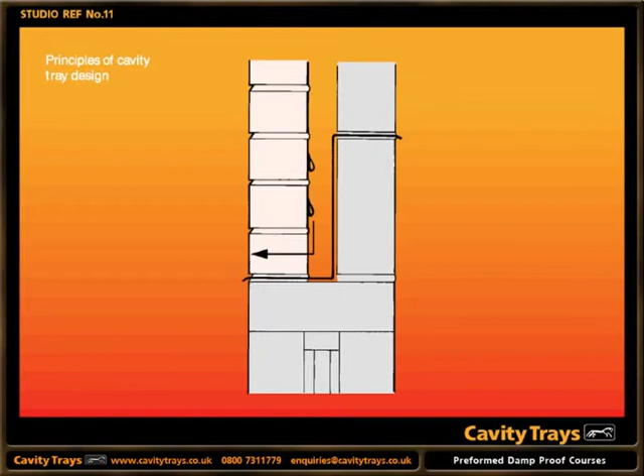However, observe the shape of the DPC drops vertically against the inner skin. Such proximity with the inner skin is best avoided. And as this arrangement lacks the requisite stop ends, water can discharge into the cavity and against the inner skin, which is unacceptable. If the cavity is fully or partially insulated and water discharges into such insulation, the water will saturate and spread indiscriminately in all directions. And this assumes a DPC profile is uniform and correctly shaped.

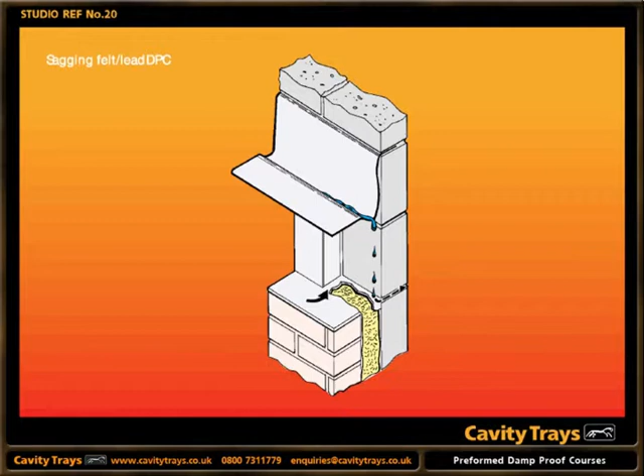If it's distorted, out of level, or permits pooling water to track back under it, the shortcomings increase. Site-formed DPCs of this style lack stop ends as defined within the regulations. Without stop ends, water discharge into the cavity cannot be eliminated. The use of roll DPC relies on the installer forming the right shape every time. This is why preformed cloaks are often used instead.

Preformed cloaks are ideal in many situations, such as at the base of a building, because at the base of a building both skins commence level with each other, enabling a preformed cloak to sit comfortably in both and provide the requisite profile. But as a cavity wall rises, it is not unusual for the skins to drift out of level.

In this example, the cloak profile provides 225 mm rise, but the drifting of skin levels results in the brickwork course being lower than that required by the cloak. The result is a distorted arrangement.

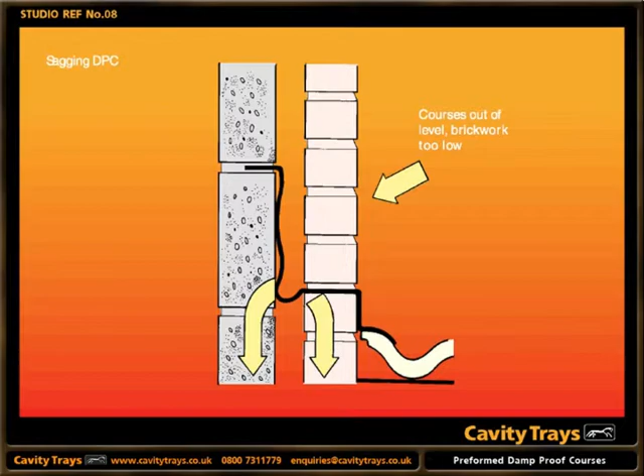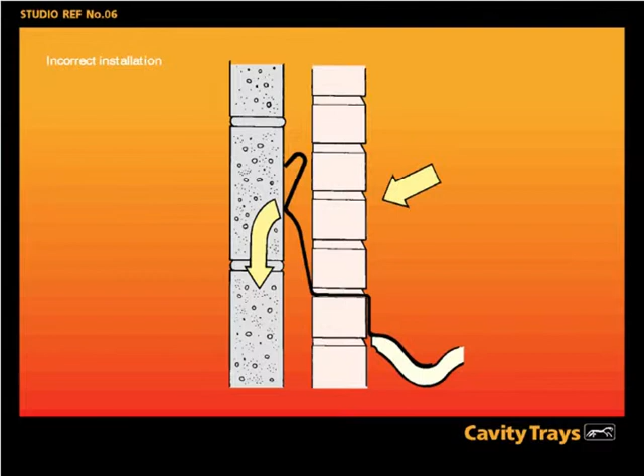When skin levels drift and the measurement by which the cloak rises cannot match the intended inner skin course, then the opposite can happen. Skins drifting out of level is a common occurrence. Look for the telltale signs on site, especially at plate level, where correction is carried out and one often observes an additional course of brick or buttering up of the plate.

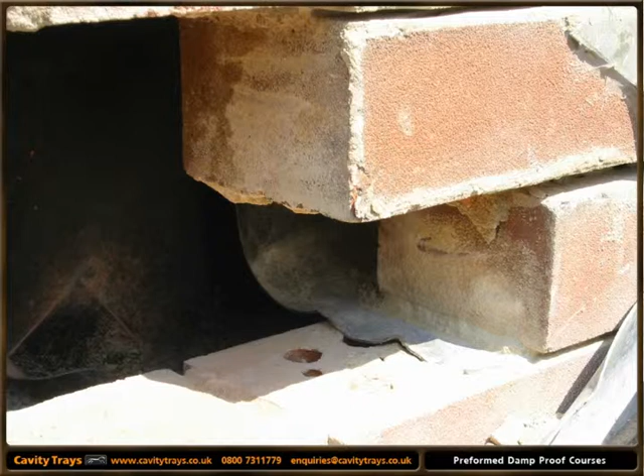Many errors can occur on site, and here we have a typical example. This DPC ends abruptly and has no stop end. The tray is also not bedded on mortar, promoting the possibility of capillary and hygroscopic penetration below the base of the DPC. And the use of perforated bricks can pose further problems if water can use the open perfs as vertical conduits via which to gravitate.

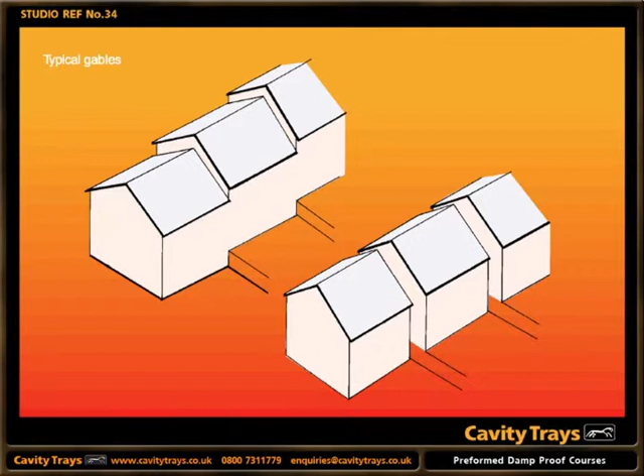The outer skin of a cavity wall is designed to saturate, and the cavity ensures the inner skin remains dry. But in the case of stepped and staggered gable abutments, the need for damp arrestment changes. The outer leaf above the finished roofline becomes an inside wall below it. There is a requirement to arrest the dampness from gravitating downwardly in the same skin and permeating below the roofline.

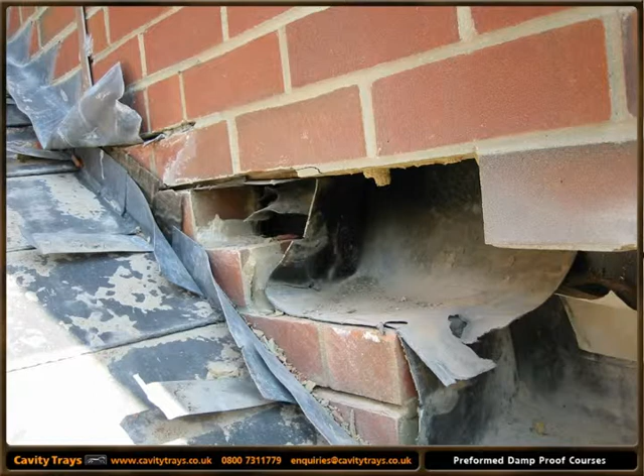This is an attempt to provide arrestment that failed. The DPC profile is irregular, distorted, and continues too far into the roofline. The DPC front edge terminates too far back from the finished face, whilst the entire arrangement lacks mortar. It is dry-bedded. The external flashing does not unite correctly with the DPC to provide uninterrupted linked protection.

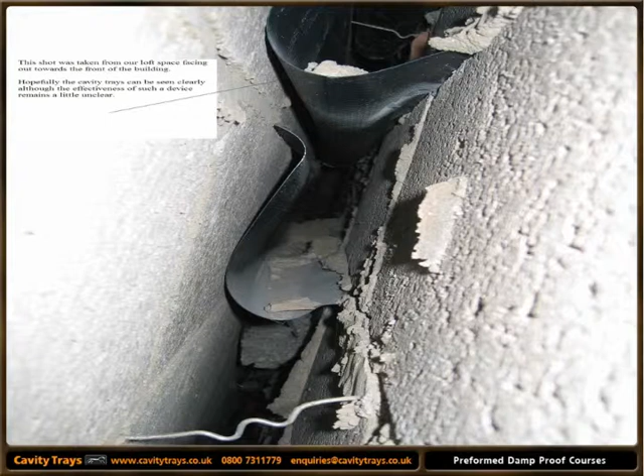This view into a typical cavity shows what can happen using standard rolled DPC to create a stepped arrangement for a sloping abutment. The DPC profile is irregular and badly formed, with no vertical continuity between sections. Looking from the inboard end nearest the roofline, there are no stop ends. The DPC is open-ended, so arrested water can discharge at either end, with no guarantee where it will land.

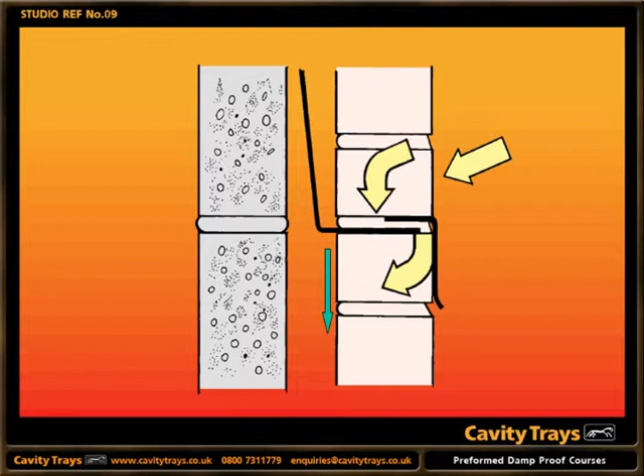Where DPCs and trays require flashings, it is essential the two interface correctly. In this instance, a cover flashing has been introduced incorrectly, positioned above the DPC, allowing arrested water to permeate under the flashing. Flashings, if introduced separately, must terminate under the DPC to a depth and lapping compression that provides a watertight relationship. This extract from the NHBC standards shows the relationship required to form a satisfactory union between flashing and DPC.

The mortar below the cavity tray DPC is raked out while still green to provide the required recess. The flashing is inserted and wedged. The union is subsequently pointed in.

Importantly, this approach assumes the DPC is correctly positioned in the first instance. If the flashing is a running flashing, as opposed to a lap flashing formed with separate pieces under each DPC tray, be aware that a running flashing cannot provide weathering protection to the same extent. A lapped flashing offers greater protection and is always preferable.

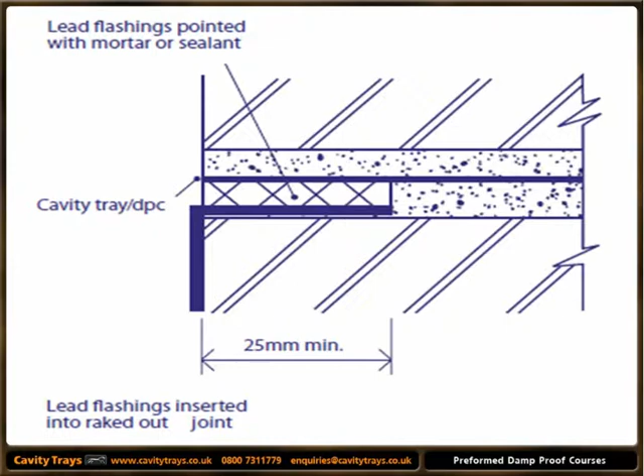Raking out under the DPC was not possible in this example, as there was no mortar underneath - the DPC had been dry-bedded. The attempt to provide a slot for the flashing damaged the DPC edge. The resultant installation was unsatisfactory for three reasons: dry bedding, damaged DPC, and the flashing ending up on top instead of underneath the damp course.

Since the founders of the company, now called Cavity Trays Limited, created the first cavity tray in the 1920s, the expertise and understanding of the current company has grown. The company has a lengthy and proven track record unequaled by any other organization within this specialized field.

Approved products of Cavity Trays Limited are referred to as cavity trays or cavitrays. They are all accompanied with a performance warranty. The first preformed cavity tray, or cavitray, designed for stepped and staggered gable abutments is the Type X.

The Type X is a preformed DPC tray specifically made for stepped and staggered gable abutments. It is molded from polypropylene DPC and supplied with its own flashing already attached. Type X trays are built into the outer skin only, just above the abutting roofline. The interconnecting trays arrest cavity wall water flow and dampness, preventing it from gravitating downwardly below the roofline. The integral flashing of each tray eliminates the need to cut and rake out for flashings.

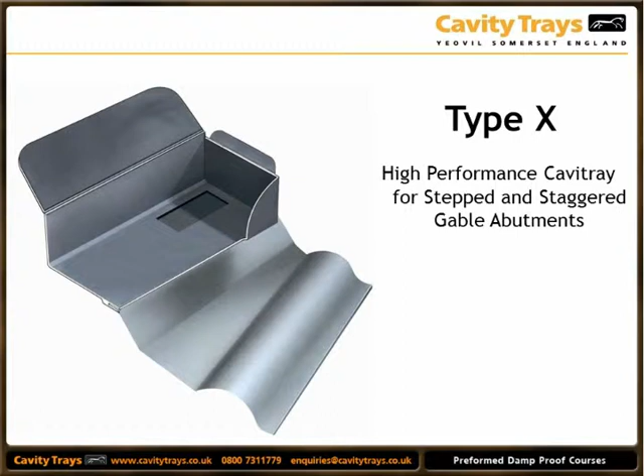Following building in of the trays, the DPC and flashing installation is complete. Later in the build program, the flashings are dressed. Type X trays are available to suit all roof pitches, masonry finishes, and masonry dimensions.

Manufacturing the Type X from polypropylene produces a durable preformed tray that does not require support from the inside skin. The cavity upstand is self-supporting and hinged. It adjusts to suit the cavity width encountered rather than the cavity width intended. This ensures compatibility - the as-built width is always protected.

Standard trays accommodate cavity widths from 50mm up to 140mm. Bespoke trays are available for wider cavity widths. The section of the tray that projects into the cavity is called the cavity compartment area. It is purposely manufactured free from projections or protrusions around which mortar droppings might become trapped. The clear cavity compartment is important and aids free discharge of arrested water.

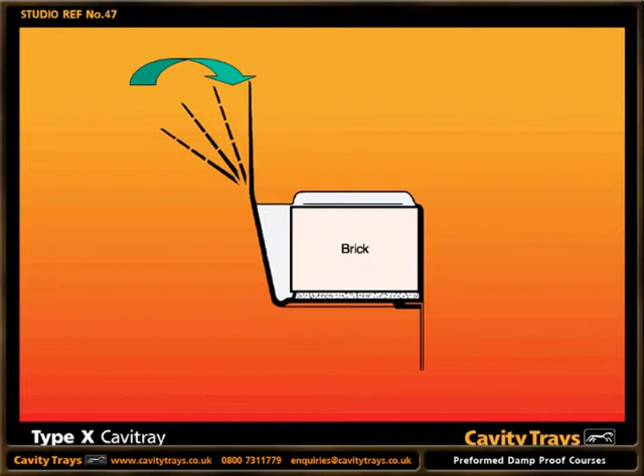Type X trays are installed in every course. Each tray up the slope oversails the tray beneath it. A protective DPC staircase arrangement is created with connecting treads and connecting risers. The flashing of each higher tray also overlaps the flashing of the tray beneath it. This results in unpunctuated DPC arrestment through the external skin and cavity just above the roof intersection.

The attached flashing provides overlapping weathering protection that can interface with the abutting roof finish. The standard flashing material is Code 4 milled lead. Code 5 lead is also offered, or one may select from alternative options, including a synthetic flashing with BBA certification.

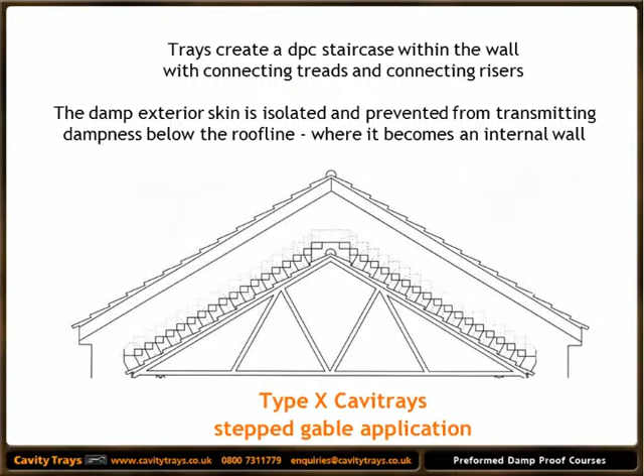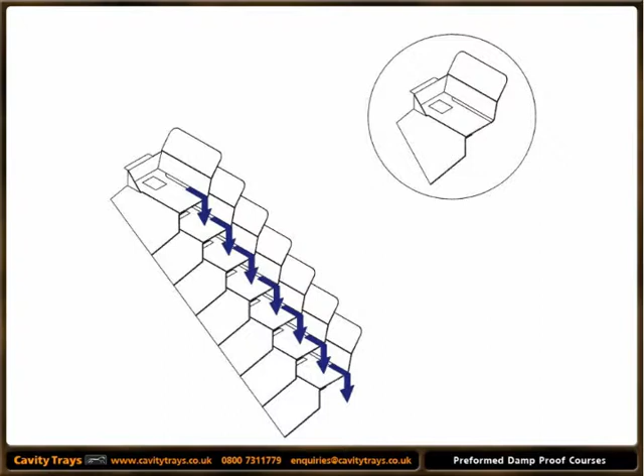Arrested water cascades from one tray to the next. It is usual for the bottom tray to be a catchment tray, with upstands at both ends that collect the water. Discharge of the collected water is directed through a cavi-weep built into an appropriate perp joint.

Accurate installation is straightforward and easily accomplished. The mason provides a chalk line or dummy rafter 75mm off the finished roof line. As each tray is bedded, its corner is positioned on the 75mm line, ensuring optimum placement. This positioning of trays and flashings creates a continuous staircase arrangement with connecting treads and risers. Full installation instructions are supplied with each delivery.

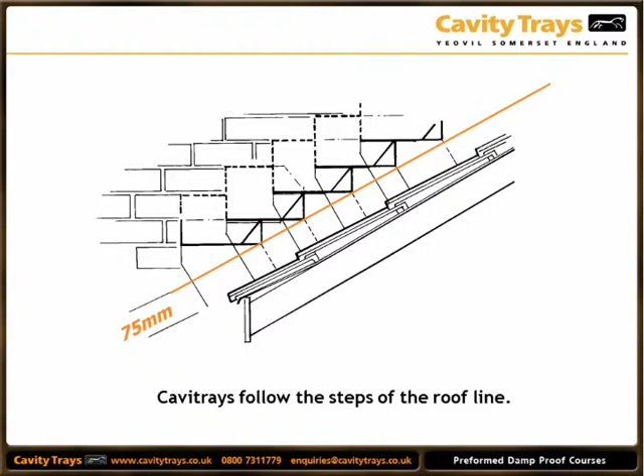Traditionally, most flashings are of Code 4 lead, but a synthetic substitute is available for use where there are theft concerns. There are also some metal alternatives for specific applications where there are aesthetic or compatibility issues. For instance, copper flashings can be supplied for copper roof abutments.

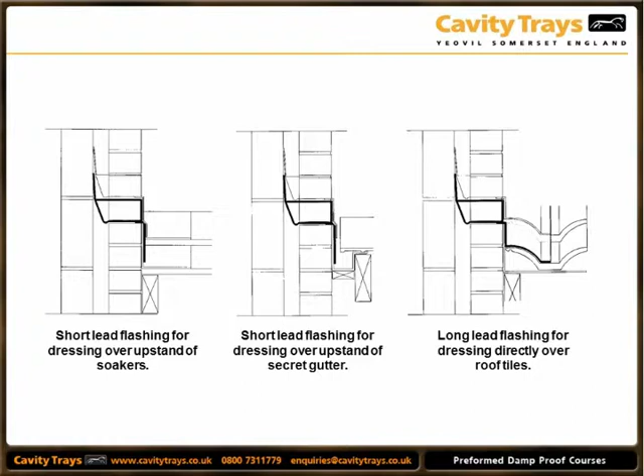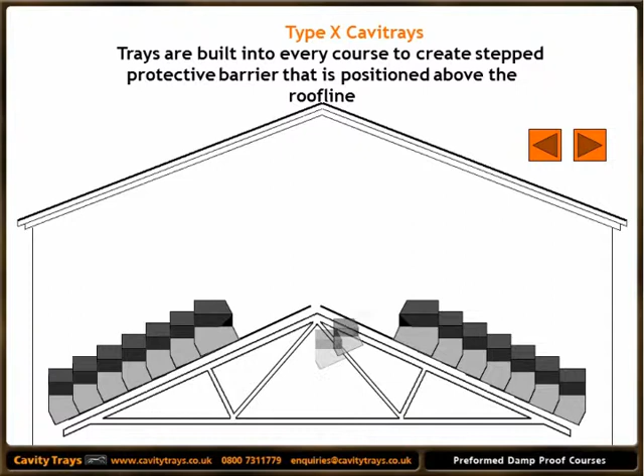Trays are handed and identified left or right. The bottom of the slope commences with a catchment tray with cavi-weep. Intermediate trays are built into each course up the slope of the roof. A ridge tray straddles the ridge, and is able to discharge at both ends into the trays below.

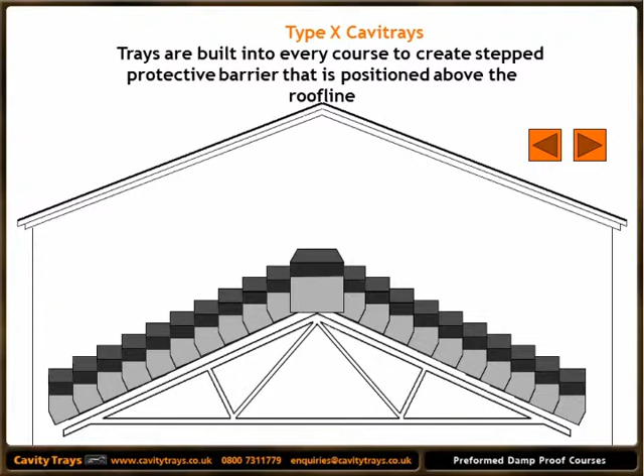The type and material used to construct the inner skin does not affect the Type X tray or its functionality. The self-supporting cavity upstand can always take up the maximum cavity width regardless of the type of inside skin. If that cavity width varies, the Type X adjusts accordingly. Trays may be used with compliant partial or full fill insulation.

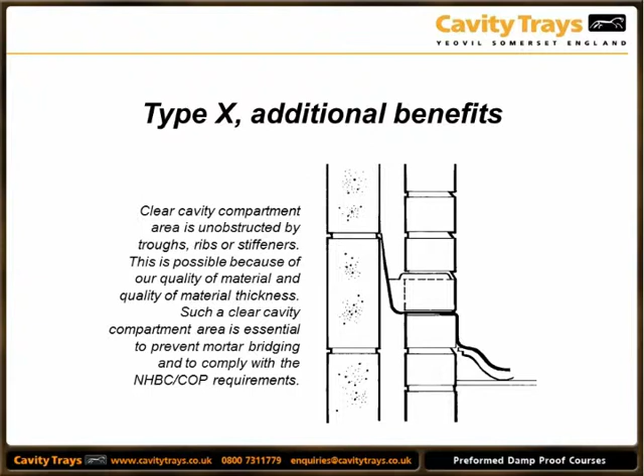Two further benefits previously not mentioned include the corner gusset to the front of every tray. This prevents water discharge at the inboard end corner. It also assists the mason: the gusset locates against the front face of the masonry, so it stops the tray being incorrectly located too far back. Similarly, it prevents the tray from being bedded too far forward, as it would stand proud from the masonry face.

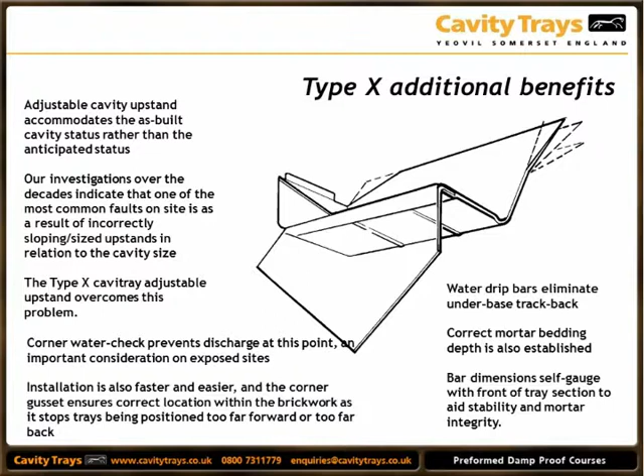Underneath the tray base are drip bars. These assist by ensuring water always discharges from the tray even if it attempts to track back underneath. They also assist when bedding the tray, as they permit the mason to bed the tray down on the mortar until the bars make contact with the masonry underneath. When they do, the bed course is of optimum thickness.

The individual lapping flashings of the Type X provide far more resistance to wind-driven rain compared with a conventional running flashing. When rain is blown under the leading edge of a conventional running flashing, it is immediately in contact with the masonry under that flashing. Even if there is a secret gutter or soaker in position, it does not extend to where the flashing leading edge emerges from the wall. This is the area of weakness via which wind-driven rain can permeate inwardly and downwardly.

In contrast, the flashing on every Type X tray laps with that of the adjoining tray. Wind-driven rain is arrested by the next layer that isolates the wetness and prevents it from coming into contact with the masonry fabric. Cavi-tray overlapping flashing is another aspect of the Type X tray not replicated by any other manufacturer.

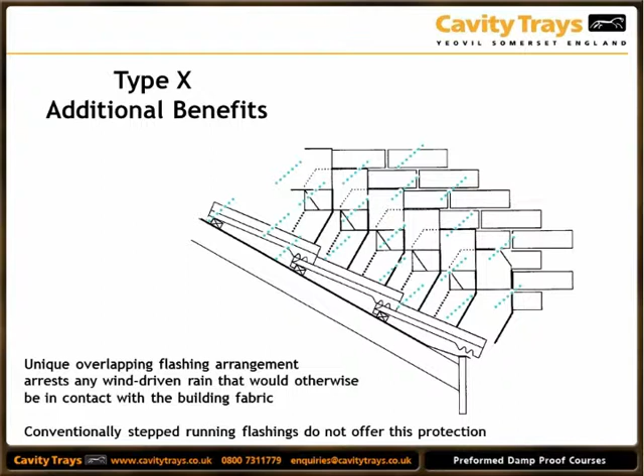At the bottom, we have the catchment tray. It is the first tray to be built in. It resembles an intermediate tray, except it has two ends, so it can collect the water for discharge via a cavity weep. If the bottom of the tray run coincides with the corner of a building, instead use an external or internal angle tray.

The trays that are then built into each course and make up most of the installation run are intermediate trays. These continue until the ridge is reached. The ridge tray straddles the ridge and discharges from both ends into the intermediate trays.

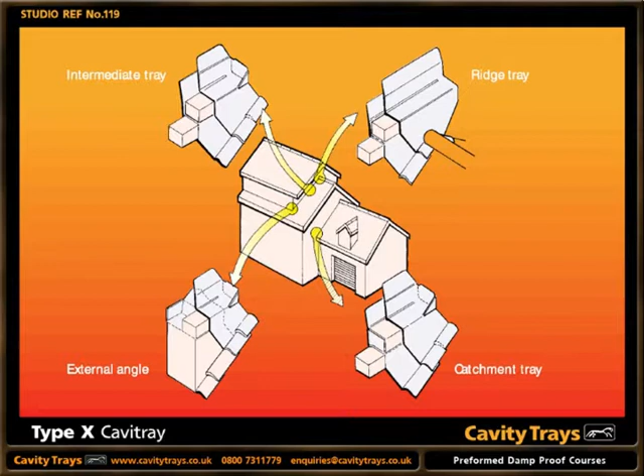Cavity Trays Limited operates a full takeoff service. If you wish us to calculate your exact requirements, we are delighted to do so.

Trays are available to suit walls of all styles, thicknesses and masonry styles, whether straight, concave or convex. In every application, the end upstand of each tray matches the coursing height of the material used to construct the exterior skin. The tray configuration replicates a DPC staircase with connecting treads and connecting risers.

Consider standing at the foot of a staircase with a bucket of water and throwing it onto the stairs. The water cascades downwardly from tread to tread. The same bucket of water thrown onto an open-plan staircase will go between the treads. Similarly, water will track between, into and below the roofline if the upstand protection is inadequate or missing.

Cavity Trays Limited calculates your requirements to ensure this aspect, as well as many other considerations, are taken into account, regardless of whether your wall is straight, concave or convex.

Curved structures provide an interesting anomaly. Despite the pitch of the roof being constant, the angle at the point of intersection can be different at almost every course. Requirements for curved structures are computer generated, and take into account the varying requirement at each course level, as well as other factors.

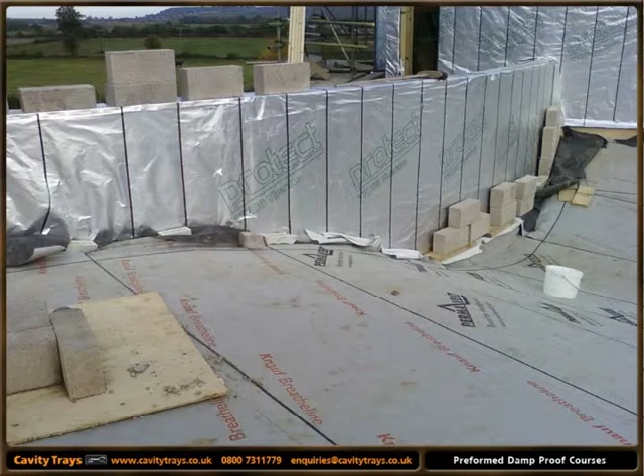This is a non-standard situation where a sedum roof abuts a wall. Bespoke trays were supplied at the roof junction intersection.

The project required trays to suit an exterior skin that was both concave and convex. The flashings of each tray varied in shape to accommodate the rise and fall of the wave roof. All calculations were prepared by Cavity Trays Limited, and trays numbered so the mason simply sequentially built in.

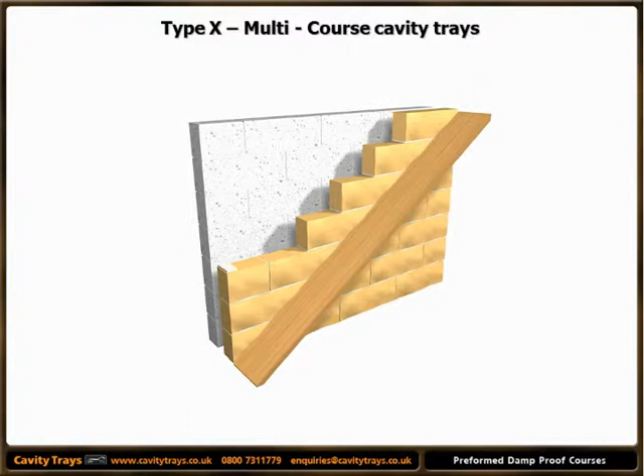This demonstrates how multi-course trays are located. Note the trays are always bedded on mortar. Installation is the same for brick, stone or block.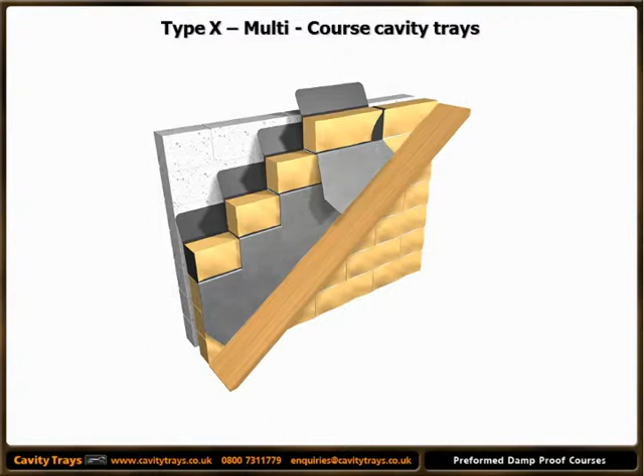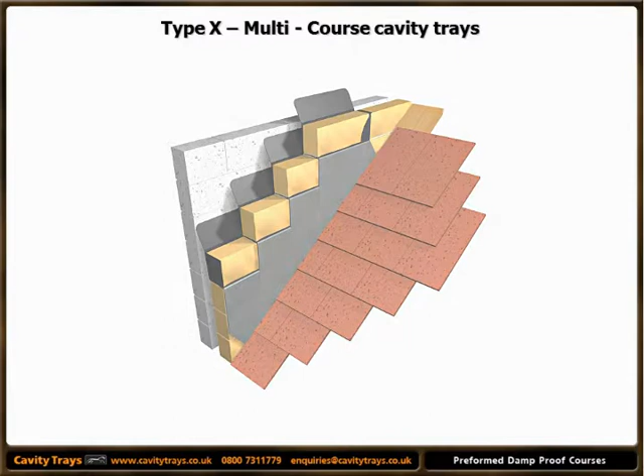In addition to new build application, preformed cavity trays may also be inserted into existing walls. This might be to remedy an ongoing problem or to introduce compliant DPC protection when an extension is attached to an existing structure. In this instance, just a couple of bricks removed from one course provide a sufficient opening.

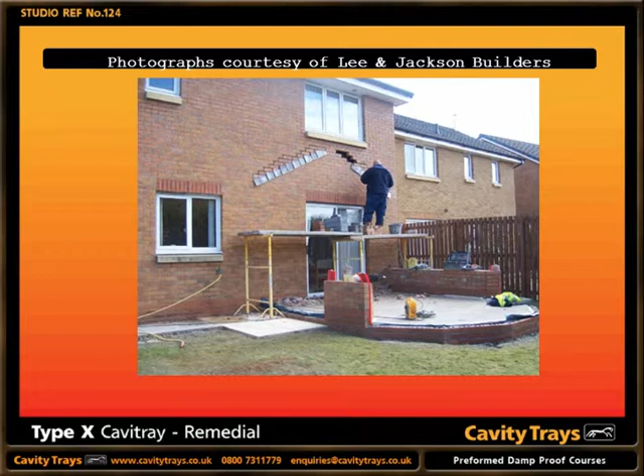Type X trays are used to remedy NHBC claims where previous attempts to provide DPC compliancy have failed. NHBC standards stipulate a conservatory attachment should comply with the building regulations. The NHBC provides guidance showing tray installation.

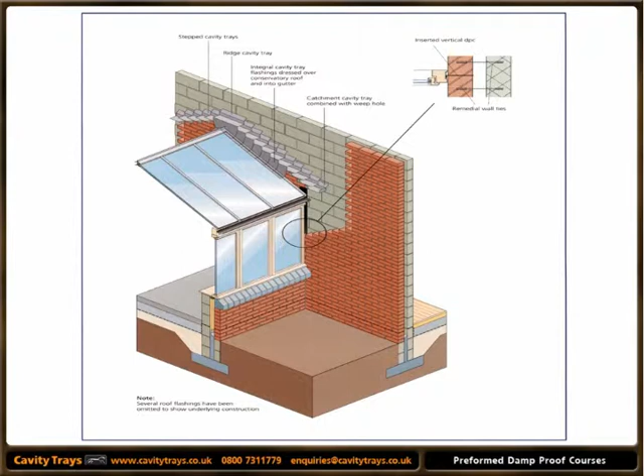Whether used for new build or existing remedial applications, the width of the cavity should never be assumed. The adjustable cavity upstand ensures compatibility without demands to puncture nor disturb the inside skin. While standard trays will adjust to suit a cavity of 50mm to 140mm, non-standard options are available for all dimensions. And if the cavity has projections or column protrusions, we supply solutions to navigate around them.

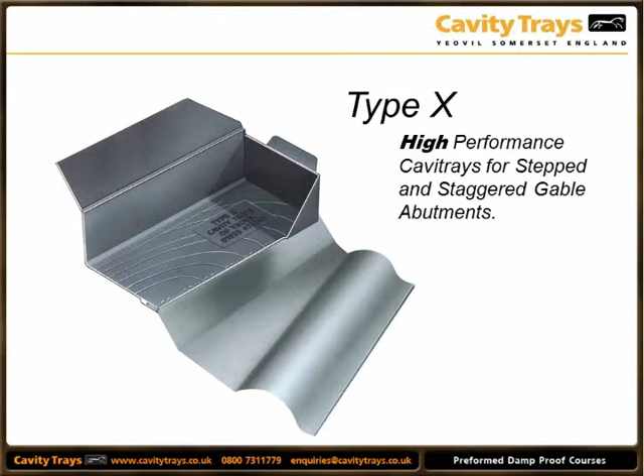At all times, DPC protection status is maintained. Remedial work is usually carried out on sites where either no trays have been fitted or the use of floppy raw material has proved inadequate.

The arrangement did not prevent dampness entering the new library beneath the sloping roofline. The unsatisfactory installation was removed and the originally specified approved Type X trays installed. The damp problem ceased.

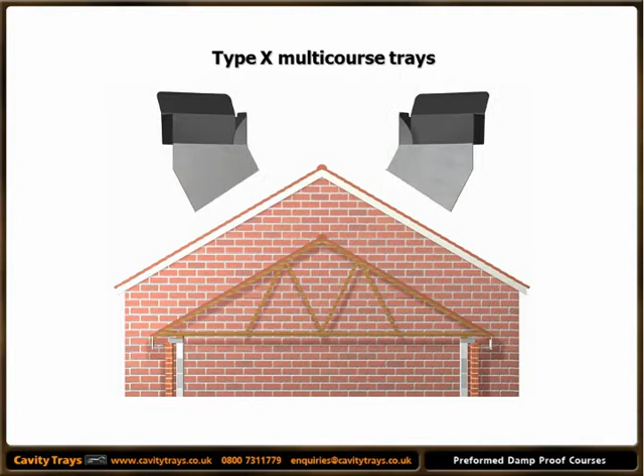Where Type X trays are installed in an existing wall to regularize the construction, the procedure is repetitive and sequential. Note how the upstand always adjusts to suit the as-found cavity width.

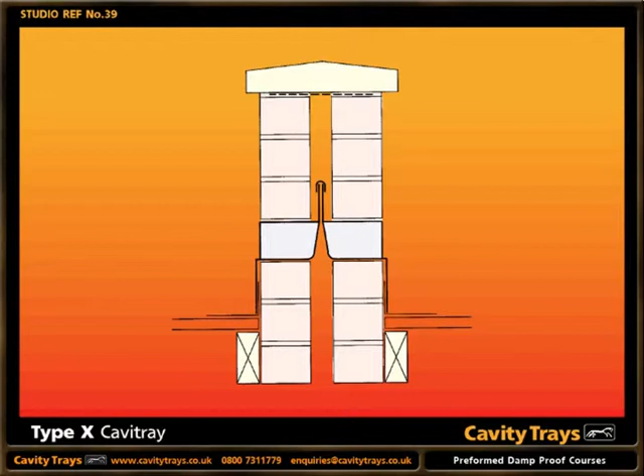Where a cavity party wall rises above the roofline, a different approach is required. In this instance, both roofs are at the same level. The trays are manufactured to dimensions that permit them to be used back-to-back and linked at the top. This establishes DPC integrity to both skins. With both parapet skins being external, this approach prevents wetness from coming into contact with the backs of the upstands. This applies only if the roof levels are identical.

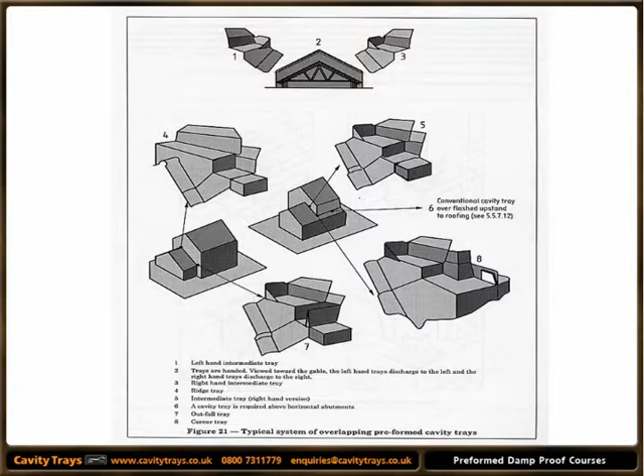We now look at horizontal abutments. The tray type for horizontal abutments is called the Type G cavity tray. With a similar profile to that of the Type X, Type G trays have an adjustable cavity upstand and integral stop ends. They are supplied in brick module lengths, the most popular being 900 mm, 675 mm and 450 mm.

Adjoining lengths simply interlock together utilizing the integral stop ends, so long runs can be created that really consist of a number of connected trays.

Type G trays can be supplied with or without an attached flashing. The Type G most used on sites has a flashing of 150 mm of code 4 lead. Other flashing lengths and types are available. The flashing is extended beyond the end of each tray, so when adjoining trays are clipped together, the flashings lap appropriately. Laying of trays onto mortar proceeds from left to right.

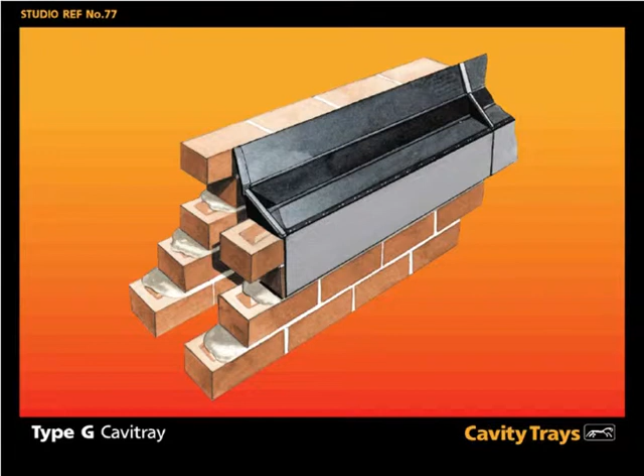The tray end upstands coincide with the perp joints, so the bonding pattern need not be altered. Water arrested within each tray is evacuated out of the wall via caviweeps. These are incorporated within perp joints towards the center of each tray. Long runs of tray are really a series of standalone yet attached self-discharging units.

The variable back upstand is designed for the as-built rather than the as-intended cavity width. Standard Type G trays can service cavity widths from 50 mm up to 160 mm. Non-standard upstands are offered for wider cavities.

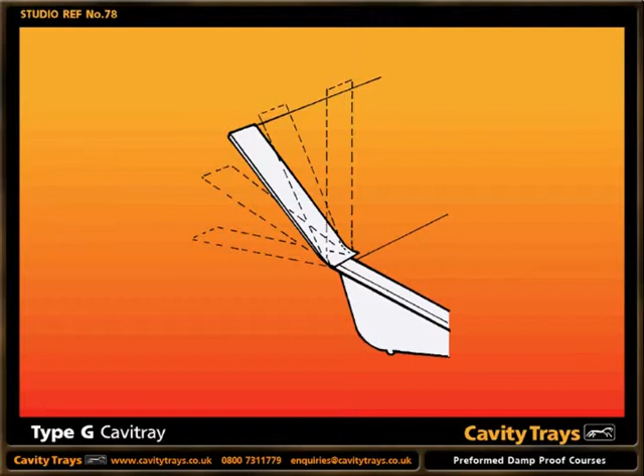Type G trays are designed for new work applications. As with the Type X range, we can supply models with different base and length dimensions to suit your masonry module and bonding. Type G cavity trays provide the horizontal intersection arrestment solution in new build applications. For existing structures, an alternative is available, the Type E.

The Type E tray is similar to the Type G, but is specifically designed for insertion into existing walls. It is a tray for horizontal insertion into existing cavity masonry above the roofline of the new extension or conservatory room. It is also regularly used in remedial applications where an existing DPC has failed.

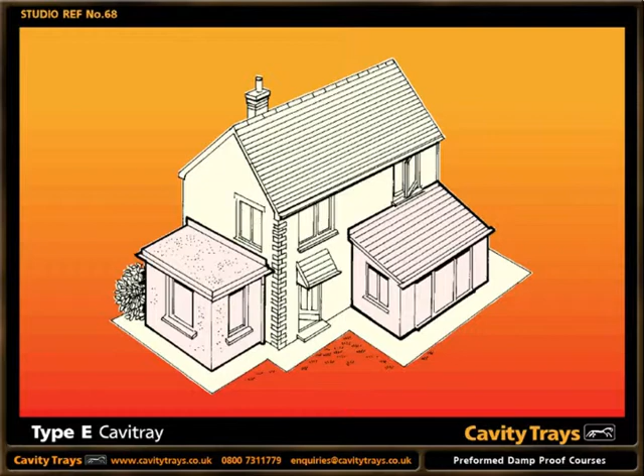Here are two typical examples. Underneath the new roof, the original outside wall of the property becomes an internal wall. There is a requirement under building regulations to prevent water that penetrates above the roofline from gravitating below it.

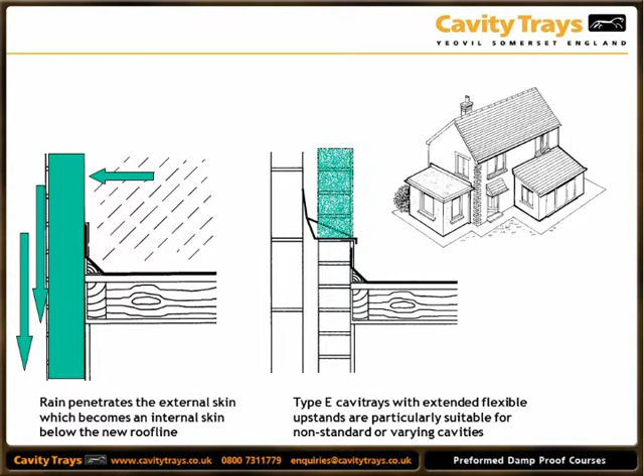Water permeating the outer skin must be prevented from tracking downwardly. A flashing only is insufficient to stop ingress. When inserted into the masonry, the Type E can prevent downward travel, in a similar way to the previously described Type G. The difference is the Type E is manufactured in short lengths, so the existing masonry can be cut out progressively, and the short, interconnecting Type E lengths introduced with a minimum of disturbance to the structure.

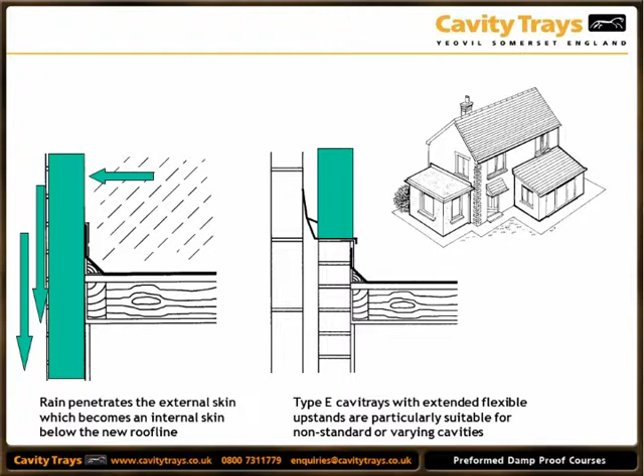Each standard tray is 450 mm in length. Removal of just 3 bricks provides a working opening. Into this opening and onto mortar bedding, along which a separate flashing is unrolled, is located the first Type E tray. The video that follows demonstrates how a 3-brick opening sequence is repeated and the flashing unrolled to progressively create

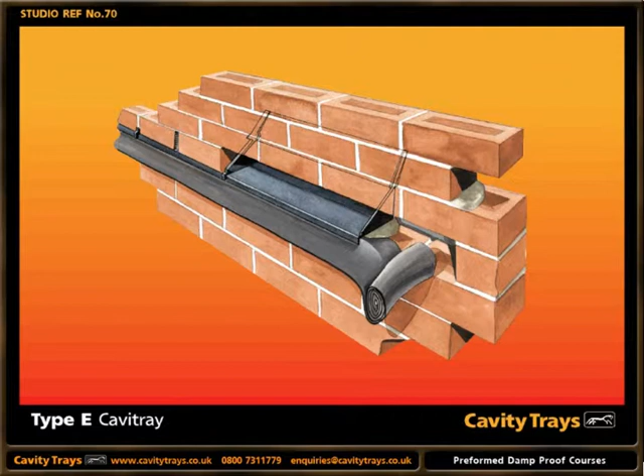a protective long run. Installation is normally from left to right, and masonry is mortared and wedged back into each tray before the next tray is started. A cavi-weep is introduced into the most central perp within each tray to provide an evacuation route for the arrested water. Standard internal and external angles permit any run of trays to turn corners.

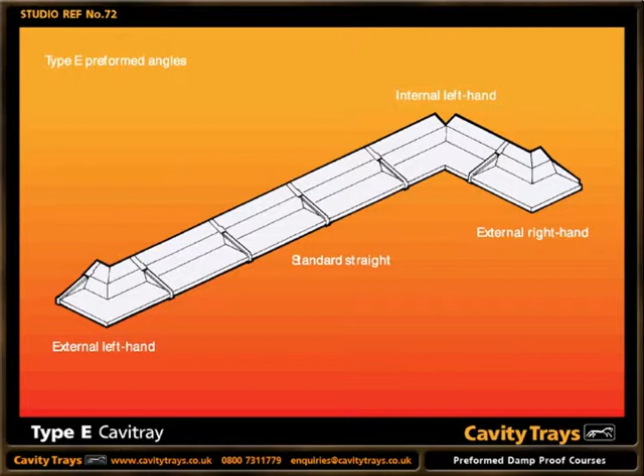Special angles and infill lengths are available to address bespoke requirements. All tray dimensions are variable, so if the existing masonry skin calls for trays of a greater depth, length or height, an appropriate tray can be supplied.

The intersecting concrete can act as a bridge via which penetrating water can track towards the inner skin. This occurs where no DPC provision has been built in or the existing arrangement has failed. Type E trays can be introduced to remedy the problem. In such applications, a flashing is not normally required to be introduced under the tray. The tray is directly bedded.

Interestingly, this type of construction is technically flawed, as it relies on water not permeating the exposed cast concrete face. This is why the exterior face often receives some form of finish or treatment to act as a Macintosh and prevent permeation. The end upstands of the Type E ensure integrity is maintained where the end trays abut any vertical columns. At all times, the front lip guards against wind-driven rains challenging the bedding course, as it is covered.

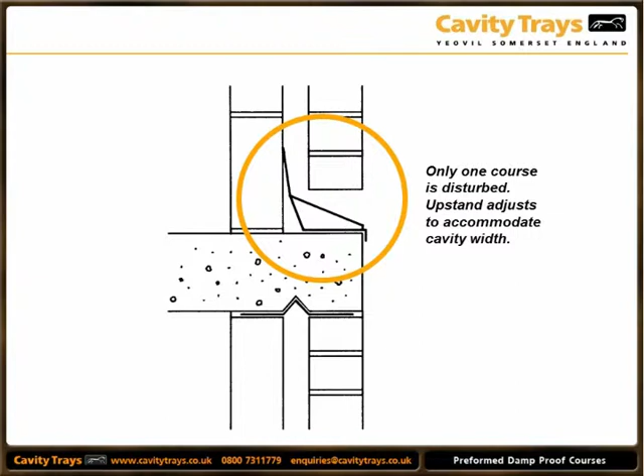Type E installation sequence, working from left to right, utilizing a cover flashing, weeps and slate pinning as required. Note the ability of the back upstand to adjust to the as-found cavity width.

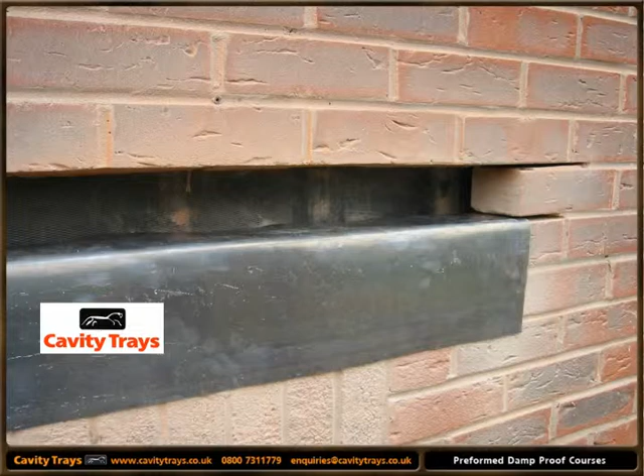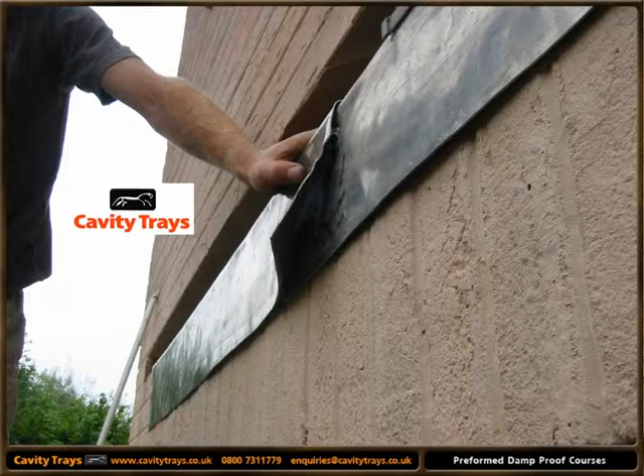In normal applications, just one course of masonry need be removed. Here we see the flashing awaiting subsequent mortar and tray bedding. We recommend a 3-brick opening is optimum for progressive insertion of trays. Cavity weeps are seen here incorporated in the most central perp of the masonry within each tray. The cavity weep colour can be chosen, the most popular being grey, as it visually merges with the mortar colour.

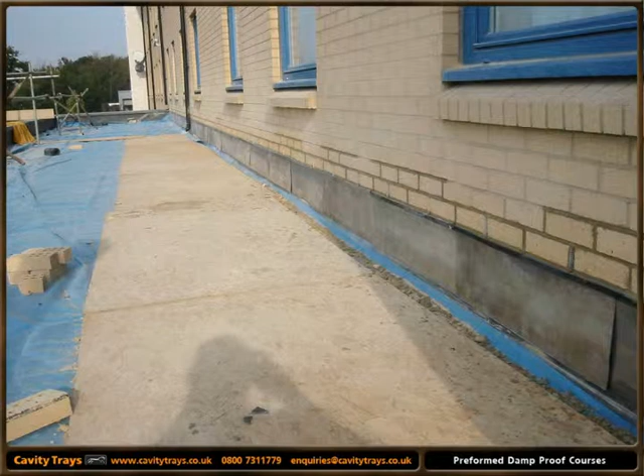Typical example of Type E cavity trays installed in a hotel in Essex, used in conjunction with a lead cover flashing. A decision was made here to remove 2 courses rather than 1, as the cavity was discovered to be rather choked. The flashing in this instance is larger than one would normally use, apparently to link with a specific roof style. This wall is curved on plan, and attempts by the site operative to use roll DPC resulted in

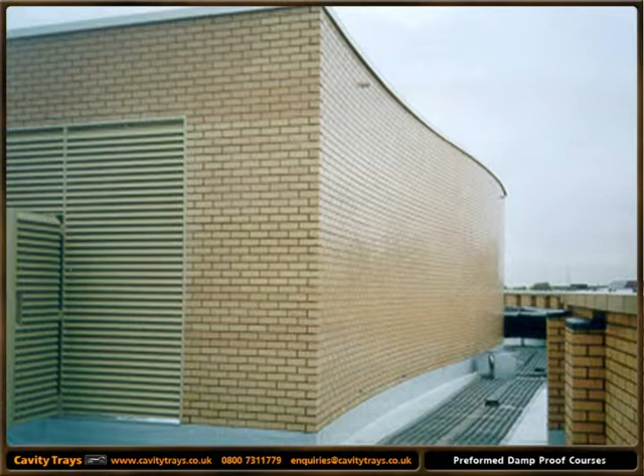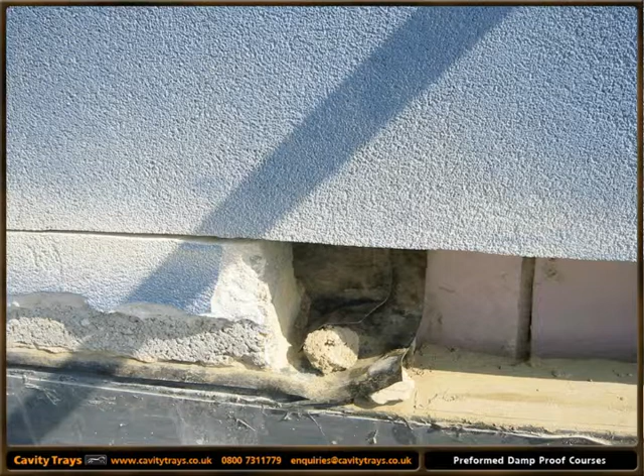puckered edges along the curves. These interfered with the uniform laying of the brickwork, so the mason cut the puckers off. The arrangement failed to prevent wet ingress. Modified curved Type E trays were supplied to replace the failed roll form material. The structural damp problems were immediately eliminated. Designers should be aware the use of roll and sheet material in practice rarely results in a consistent profile and quality of build.

Apart from the difficulty of introducing a functionally efficient profile into an existing cavity, the linking of adjoining sections and the uniform creation of stop ends is rarely dependable. Such concerns can be witnessed here, where despite the wall being rendered, the amount of wind-driven water penetration was extensive.

If an installation relies on an operative with a roll of DPC material and a craft knife working in site conditions, the outcome is usually questionable at best. The following pictures are some examples of what can go wrong.

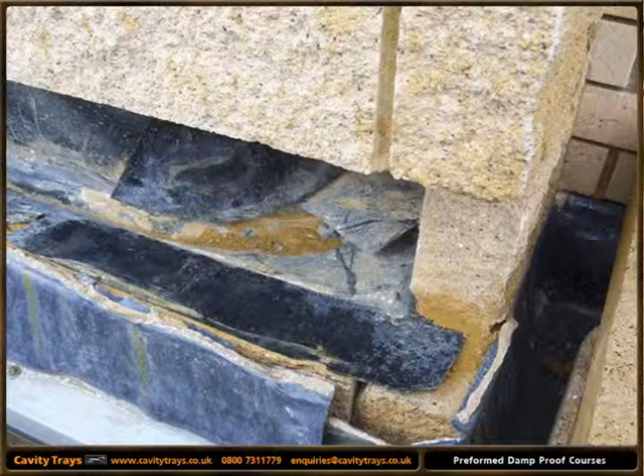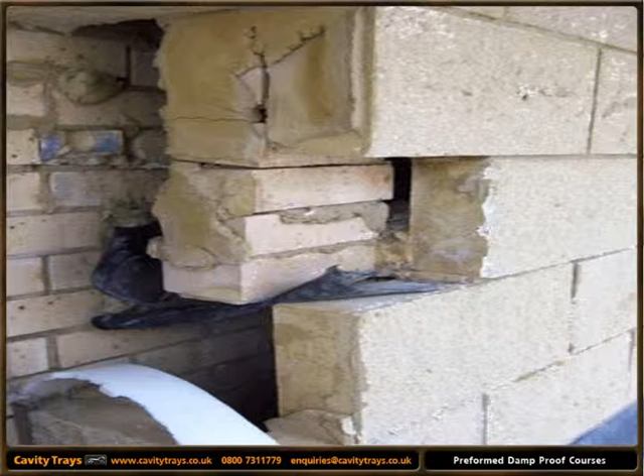Poor installations create problems. They do not solve them. Flashing only an intersection is insufficient. We are uncertain what the operative was trying to achieve with this arrangement that has no less than 6 irregularities.

DPC trays for use over common openings are called Type C cavity trays. Type C cavity trays are preformed, protective DPC trays supplied to harmonize with a support arrangement over the opening. They are available in an unlimited variety of profiles to suit all lintel types and all construction dimensions.

Using a preformed tray ensures the build detail is correct and consistent. The dangers of distortion, misplacement, sagging or incorrect profile associated with floppy roll DPC need not arise. Trays suit traditional and timber frame construction.

Wastage can be eliminated, while stock and cost control can be accurately maintained. Trays are supplied in lengths to suit the opening, with sufficient end projection into the masonry to provide the requisite protection over the reveal closing.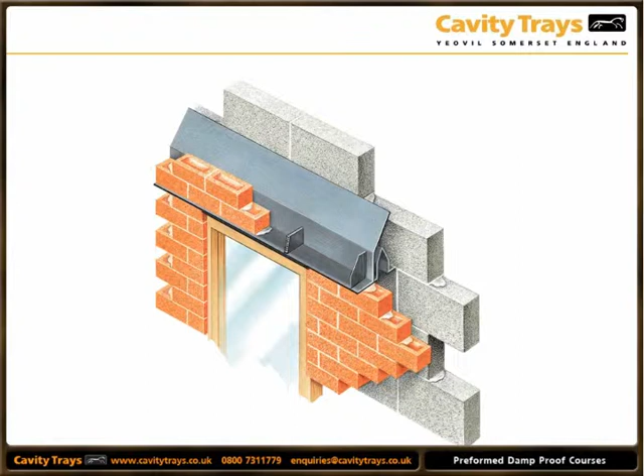The specifier may select a self-supporting upstand as shown, or an upstand that additionally returns into the inner leaf. Both options are available in a profile to suit the specifier's opening support arrangement, being it utilizing metal, timber, or concrete lintels. Current directives prohibit the discharge of water off the end of lintels and DPCs into the cavity.

The use of stop ends addresses this requirement. This is an example of the Type L stop end that can be attached to our preformed Type C cavity trays. The integral bonding strip in its base permits the installer to position it in the most appropriate perp joint towards the end of the tray.

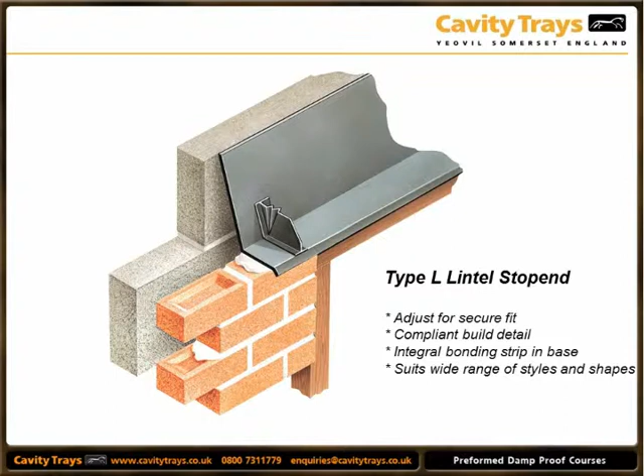Thus the bonding remains unbroken. Two styles of standard stop end are manufactured. The L90 is suitable with vertically rising profiles. The adjustable Type L is designed for use where the DPC tray upstand is sloping.

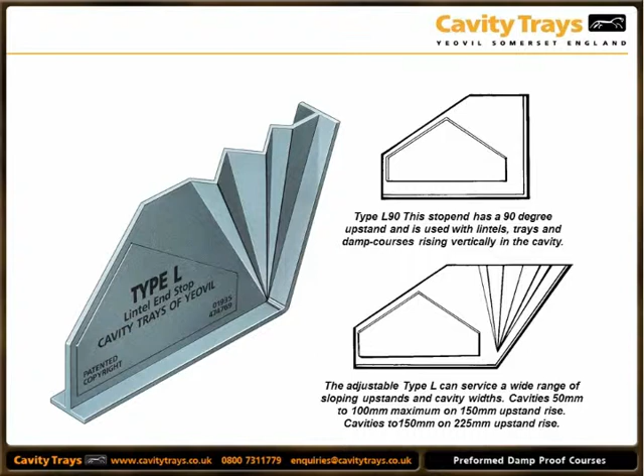Not all openings in cavity walls have a horizontal head, and to conclude, we look at some variations. Type BA barrier arch trays are preformed to suit the specific opening dimension and can be used in conjunction with a metal curved support lintel or alternatively incorporated within a traditionally constructed arch built off timber centering.

The tray can be built into the inner leaf or attached to it aided by a cavity strap. Thus, Type BA barrier arches may be used in timber frame as well as conventional construction.

The rise of the arch dictates the dimensions of the cavity spanning section, whilst the overall width of the Type BA can be extended beyond the actual opening size to an extent to unite with adjacent features where required.

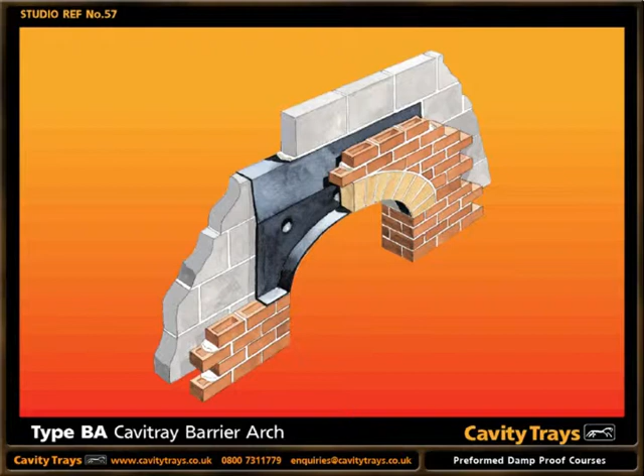This is an example of a three-centered opening. Trying to achieve the same using raw material would be challenging. The advantage of using Type BA barrier arches becomes more apparent when styles of this nature are encountered. Type BA arches are manufactured from polyethylene and are accompanied with a performance undertaking.

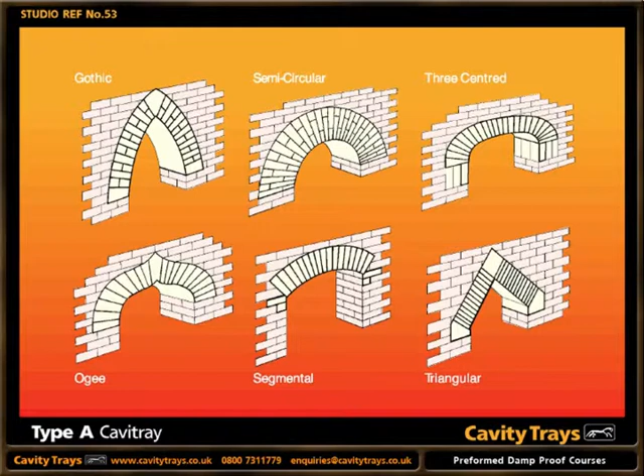Finally, where the opening becomes circular, the Type K cavity tray is supplied, providing 360-degree protection. It glove fits the circular frame, establishing a protective presence between frame and damp masonry. It prevents dampness from reaching the inner skin whilst channeling water safely around its exterior.

Along the bottom of the Type K is an integrity flap that ensures water that navigates and naturally gravitates to the 6 o'clock position cannot track back into the structure. Type K is available to suit the dimensions of the specific circular frame and whatever style of masonry skin permutation is being used. An insulated surround is offered as an attachment.

This brief presentation has only scratched the surface of the numbers and types of products available from Cavity Trays Limited. For damp courses, cavity trays, cavity closers, membranes, contaminated land barriers, fire and acoustic stops, and ventilation for roofs, walls and floors, all such information can be found within our latest technical manual. Approved products and an accompanying performance warranty for the benefit of architect, builder and client.